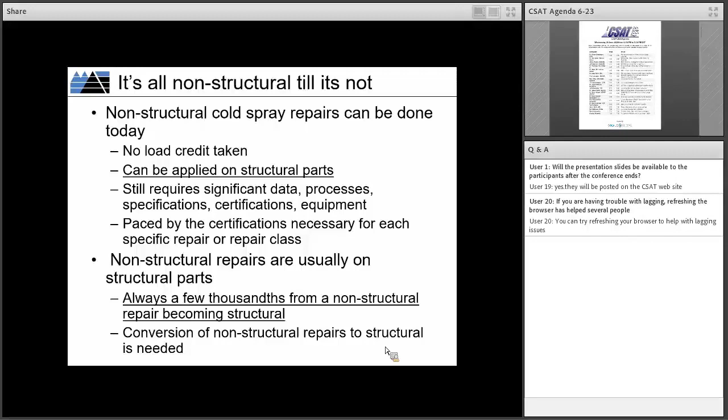So when we start talking to our customers, and Boeing's got a lot of platforms out there, we see no shortage of needs. The most common places we saw were corrosion, especially at upper skins. Basically under every door you could find, there's corrosion. The second thing that we saw lots of was damaged holes. You take the access panel on and off enough times, that hole gets messed up, so you oversize it, and then you have to oversize it again. Eventually you can't oversize it. And the same thing with the substructure, so you end up having to fix holes.

And then the last is wear surfaces; we're constantly getting brought different wear surfaces. So these three things we saw constantly as potential for cold spray, and pretty much every platform has needs in these areas. And the first thing they come back to us and say is, can you give me load credit? So as an industry, we have to figure out how to get ourselves to the point of load credit.

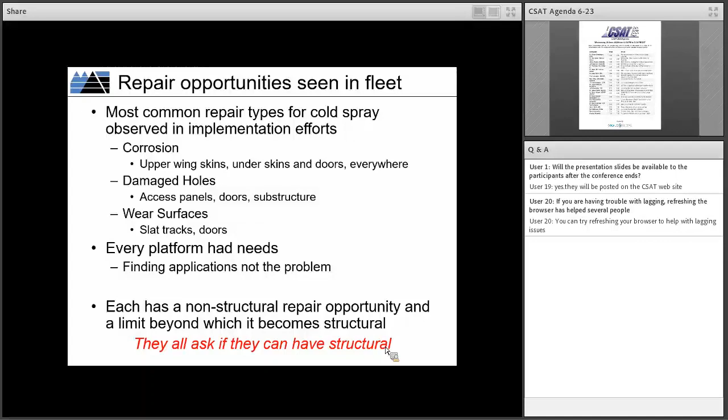So I've talked to you guys about this before. Our Air Force colleagues have pointed out that you can bucketize or use these classifications as a way of helping to explain that not all cold spray repairs are created equal. It's a good way to explain it, but the reality is we have a continuum. We've got different load margins, different criticalities, different purposes, and sometimes all of those on the exact same part. So it is a challenge to come up with classification repairs, like, I'm going to come up with this repair procedure, and you can use it everywhere that has this classification.

It's hard to do because it's more of a continuum. You can do this classification here, and this classification here, and it's really hard to come up with that general case because of the diversity of repairs out there. So the analysis time, the engineering time necessary in designing the repair and coming up with as general a repair as possible, is a significant factor in us getting structural repairs.

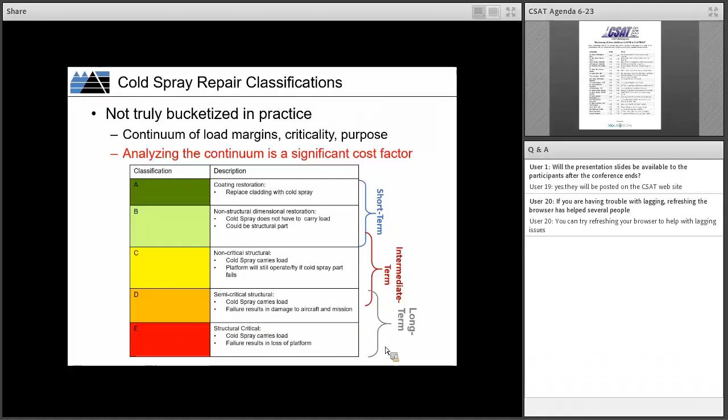So, certification requirements. There are these 5 Lincoln pillars that we have to hit: stability, producibility, predictability, then the property characterization, i.e. the static properties, and then the supportability, like the service life properties, like fatigue life and whatnot. So the 2 MAI programs that we've had, BA-22 and BA-24, touched all 5 of these, but not to the point that you can check it off and it's done.

BA-24 will have a significant focus on property characterization, both static and then fatigue and corrosion. But it's not going to solve every possible thing out there. As the industry, we have to get through all of these things. The first 3 there, stability, producibility, and predictability, we don't just have to achieve those things. We have to get to where we have a whole supply chain that can achieve them. We know we can achieve those things in one place with everything locked down.

But what happens with, like the discussion earlier, multiple different machines? I have different sites, same machine, different sites. I have different little tweaks between them. How do we get it so that, as a supply chain, we have all those under control?

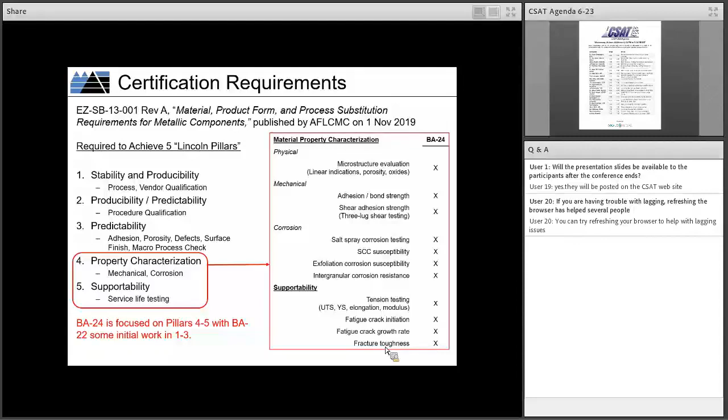So what does it look like in static? What you see here is basically a bimetallic sample. It's got a 0.2 substrate and a 0.1 cold spray addition. The 0.3 substrate would be like the original part. The 0.2 substrate would be like a part that had been ground down to remove corrosion down to 0.2. And the cold spray repair is filling it back in up to 0.3.

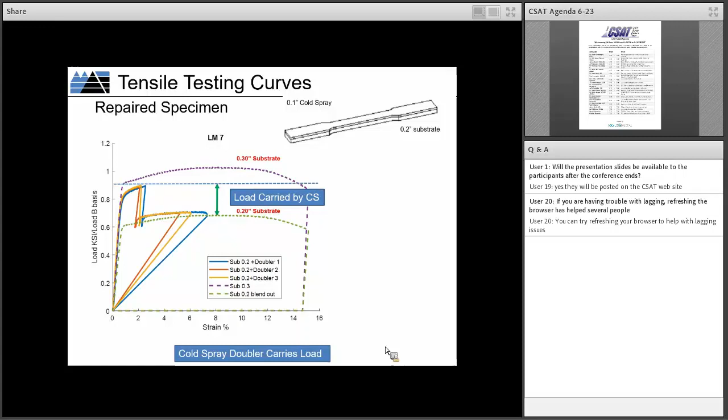And so you recover a large portion of the original capability in static, which is a good sign. We're seeing very clearly that when we pull tensile specimens, we're getting significant load credit back on static. Same thing happens with fatigue life. If you look at these fatigue coupons, the far right is a coupon where half of it was blended out due to corrosion. The second from the right is where a third of it was blended out due to corrosion.

The next one over is if I just made the whole thing out of cold spray. So with 100% thickness of cold spray, I'm getting better than 66% of remaining ligament. If I take the half blend, half cold spray situation, I've got a 1,000% improvement in fatigue life by having that cold spray carrying load. If I hit that 33%, that's about a 400% improvement.

Neither of them gets all the way back to blueprint, but it's still a huge improvement over where we are currently. Currently, if you have corrosion, you've got to remove it. So you blend it out, and you just have whatever metal you have left. If you put cold spray on there and get that improvement, we see really good opportunities to extend the life of parts and extend the life of airplanes.

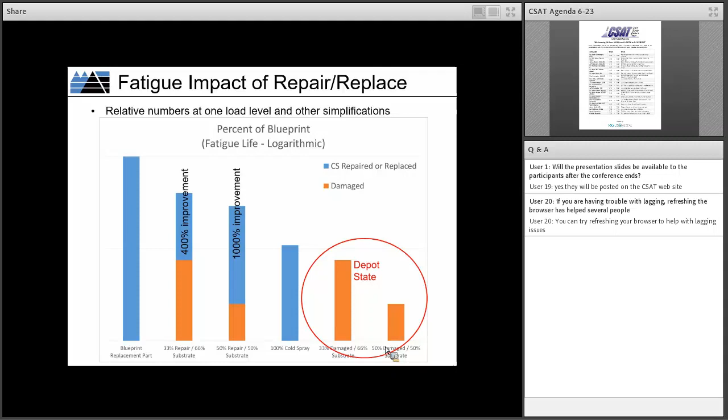Where do we want to be? I don't want to have to analyze this like crazy. I want to put the cold spray on and have it be as good as a new part, equivalent to base metal. And I think that's one of the places we've got to look at as industry: how can we get there? Can we develop the processes? Can we develop the materials that allow us to have the cold spray just be plopped on, with the spec basically saying this is as good as base metal?

I realize that may be pie in the sky, but there's an awful lot of analysis that goes into deciding exactly where you fall in between. So working towards that stretch goal is something I'd like to see.

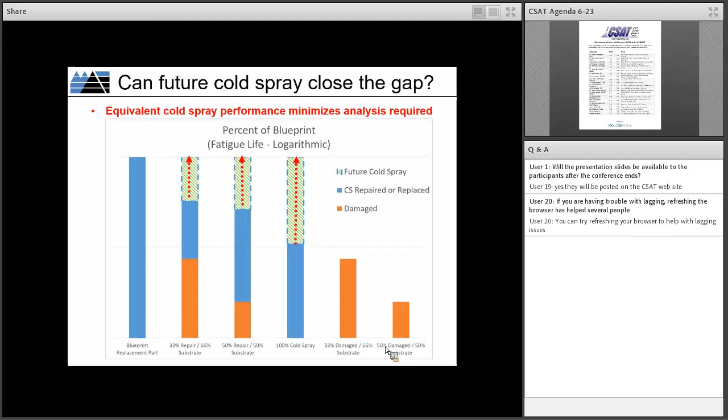What's missing in the current work that I see, and some of this is being covered by others in this group. One, for structural repair, is non-destructive testing and evaluation. Being able to have an NDT method that says the repair is good when you put it on and while it's sitting there, as opposed to relying on analysis, is a very essential thing that is not part of this MAI program, but I'd very much like to see going on.

Another is A and B basis allowables, MMPDS. Are we going to have to do A and B basis allowables for every combination of cold spray and base metal? Are we going to have to do MMPDS values? Or what are we going to do them for? Just for the cold spray? For the joint? For a joint that's 1/3 cold spray and 2/3 base metal?

There are a lot of questions that have to be answered about what those allowables look like, and we're definitely going down that path. At the end of our program, we're going to have a good package that says structural repairs are definitely feasible, but there's still work needed to figure out the best way to officially certify structural repairs. I talked a little bit about the maturity of the first 3 Lincoln pillars.

You don't do everything inside of Boeing, so it's not good enough if there's a Boeing lab that can do it perfectly. We don't do everything inside the government, so it's not good enough that there can be a government lab to do everything perfectly. We've got to have a whole supply chain that can produce the same results every time, regardless of which operator is there or which site you're doing it at. There's a program called BA-26 coming soon that's going to address a good bit of the stability, producibility, and predictability, and I'm looking forward to that.